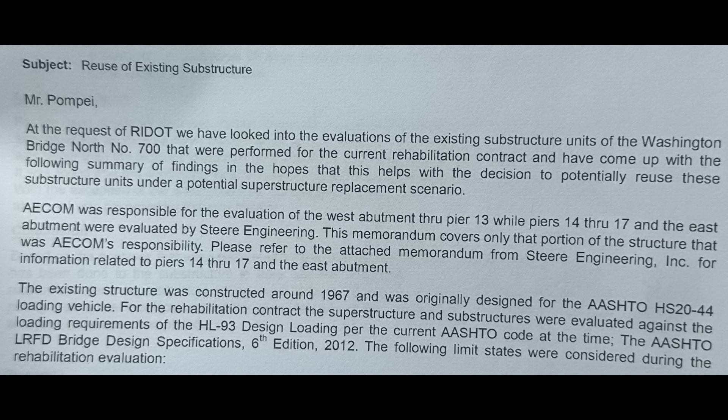So AECOM looked at the western half of the bridge from the west abutment through Pier 13, and then Steere Engineering looked at Piers 14 through 17 and the east abutment. So let's look at some of the things that they took exception to for their study. They did not perform an evaluation of the existing pile-supported foundations, as it was not in the scope of work for the rehabilitation project. And then they talk about the design methodology.

If you look at item 5, under the current contract, the substructures and the superstructure were being rehabilitated to provide for an additional 25-year lifespan, whereas a new superstructure would likely be designed for at least a 75-year lifespan. And in their analysis findings, for the west abutment through Pier 13, the results of the analysis showed that none of the columns required any strengthening, as they all have design ratios greater than 1.0. So they're talking about the pier columns.

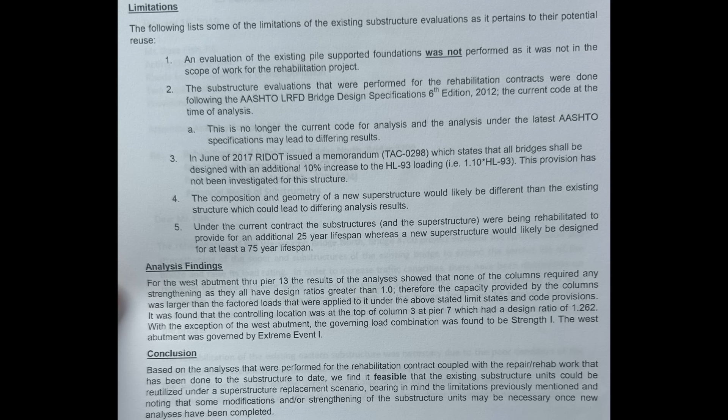In conclusion, based on the analyses that were performed for the rehabilitation contract, coupled with the repair/rehab work that has been done to the substructure to date, we find it feasible that the existing substructure units could be reutilized under a superstructure replacement scenario, bearing in mind the limitations previously mentioned and noting that some modifications and/or strengthening of the substructure units may be necessary once new analyses have been completed.

Now let's look at the Steere Engineering memo. Dear Mr. Fish, they're referring to Mr. Dave Fish, PE, who is at the time acting chief engineer for RIDOT. The rehabilitation of the Washington Bridge North Bridge 700 project included the rehabilitation and strengthening of the super and substructures of the existing bridge to extend the service life of the bridge and raise its load rating.

In order to increase traffic capacities, there have been discussions on replacing the superstructure while utilizing the existing substructure. Steere Engineering was responsible for the design of the eastern approach of the bridge from Pier 14 through the east abutment, including both the super and substructure. This memorandum concerns only that portion of the bridge.

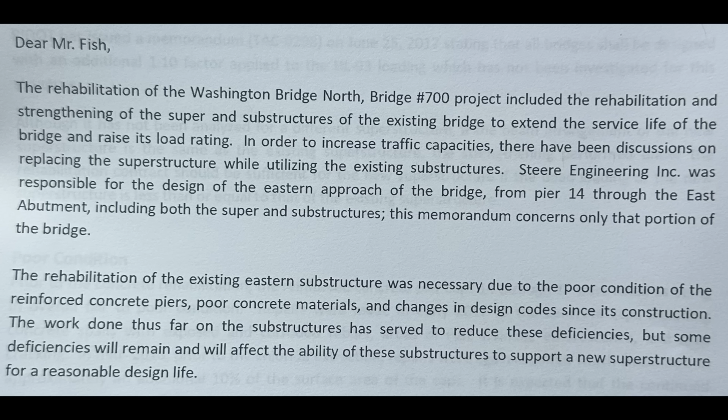They go on to say the rehabilitation of the existing eastern substructures was necessary due to the poor condition of the reinforced concrete piers, poor concrete materials, and changes in design code since its construction. The work done thus far on the substructures has served to reduce these deficiencies, but some deficiencies will remain and will affect the ability of these substructures to support a new superstructure for a reasonable design life.

And we're going to page 2, and I talk about the difference between the original and the current design loading. And at the bottom of page 2, talk about poor condition. Prior to the concrete rehabilitation, the reinforced concrete pier caps 14 through 17 were rated as being in overall fair to poor condition. Repairs were made in early 2017 to the concrete caps, including concrete spalls with exposed and corroded rebar, areas of rust staining, efflorescence, and map cracking.

In mid-2018, prior to the chloride extraction, repairs were again required, which amounted to approximately an additional 10% of the surface area of the caps. It is expected that the continued deterioration will be reduced now that the chloride extraction has occurred, though no results have been provided as of the writing of this memo. However, the caps will still be exposed to water and salt through unrepaired bridge deck joints.

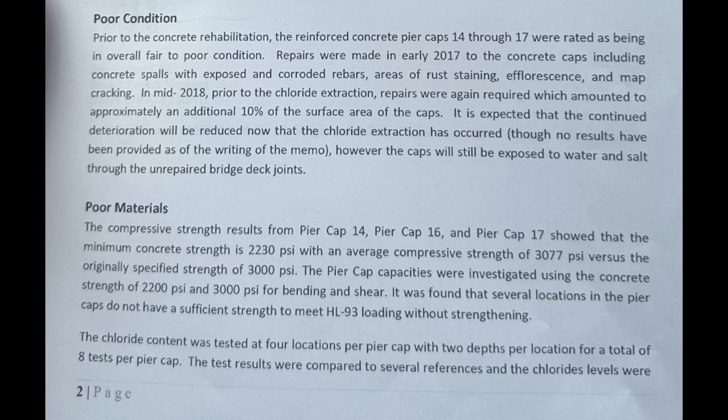The next paragraph, poor materials, basically indicates that the pier caps 14, 16, and 17 had lower strengths, considerably lower strengths than what was specified originally for the construction of 3,000 psi.

And then the last page, this conclusion: it may be feasible to reuse the existing eastern approach substructures to support a new superstructure. However, further structural analysis will need to be completed to determine the new loading on the existing substructure, including seismic, and there are several serviceability considerations that need to be considered. Piers and abutments would need to be modified in order to have a wider superstructure.

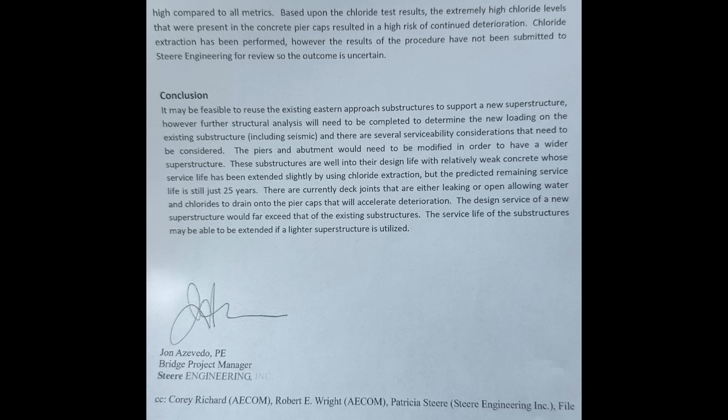These substructures are well into their design life with relatively weak concrete whose service life has been extended slightly by using chloride extraction, but the predicted remaining service life is still just 25 years. There are currently deck joints that are either leaking or open, allowing water and chlorides to drain into the pier caps that will accelerate deterioration. The design service of a new superstructure would far exceed that of the existing substructure. Service life of the substructures may be able to be extended if a lighter superstructure is utilized.

So again, we see a mention here of poor maintenance and repair of this bridge deck for years that led to deterioration of several aspects of the bridge. The pier caps, and later we found the corrosion of the post-tension anchors. So I'm going to circle back with all the questions these studies and these memos raise in my mind. But again, to show that RIDOT was apparently serious about looking at replacement of the superstructure as well as rehabilitation of the substructure for the Westbound Bridge that was later closed and demolished.

This is April 23rd, 2019, from a Lori Fassett. I understand she serves as a project manager at RIDOT, and she's sending an email to Anthony Pompei, who we mentioned previously, and they're talking about the anticipated cost. And she says, we based it on the bid price of the Washington Bridge South Replacement Project from 2003 that was $40 million, which had more significant substructure work. With inflation, we estimate about $50 million for the superstructure replacement and another $10 to $15 million for the ramp highway work, which gave us a $65 million.

So why did they look in 2019 to replace the entire superstructure of the Westbound Bridge and rehabilitate the substructure? And instead of doing that for $65 million, decided, oh, we're going to do essentially partial repairs, not replace the bridge deck, apparently not do anything to the substructure, and it's going to cost $78 million. That was a contract awarded in 2020 to Aetna Barletta. And they get halfway through that contract when they discover the broken anchor rod, and the rest is history, as they say.

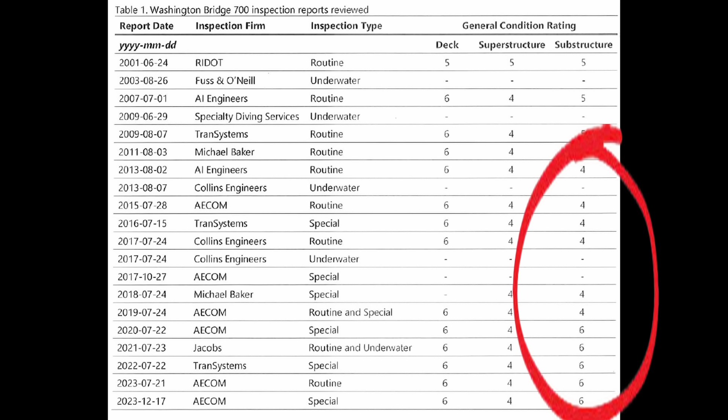One of the things, and this was brought up at the hearing when Attorney Cunha posed these questions to RiDOT Director Peter Alviti, but they referenced the Wiss Janney forensic evaluation report and noted that the substructure condition rating from the bridge inspections for the Westbound Bridge was a 4 all the way from 2013, and then suddenly changes, goes from a 4 to 6 in 2020.

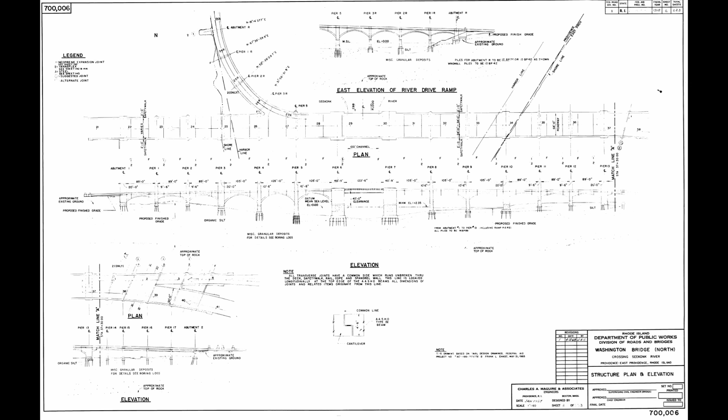And again, it's not clear what, if any, work was actually done to the substructure to change that rating. Director Alviti at the hearing referenced that there was work done, but didn't provide any specific information. I suspect that it wouldn't be possible to reuse the existing foundation and just put a new superstructure on it as they were planning back in 2019 if the condition rating was only a 4 for the substructure. And it looks to me to be some minor miracle that suddenly the condition rating went to 6. But again, there's so many things about this project that don't make sense to me.

Now, at the end, I'm going to go through a list of questions that I have about what all this may mean. But I think it's extraordinary that RiDOT clearly was looking at replacing the westbound bridge clear back in 2019, and instead they embark on a series of contracts that weren't completed for a variety of reasons, and they didn't resemble, in terms of scope, anything approaching a more ambitious superstructure replacement project.

Before I get into those items that occurred to me here, I want to mention I had that video post this morning, and a lot of you have commented about the rather appalling performance of RiDOT Director Peter Alviti in terms of not being able to recall key information, not being knowledgeable about key aspects of his administration of the DOT.

And another possibility occurred to me, and that is sort of like if you're a Kung Fu fan, there's an old 1978 Jackie Chan movie called Drunken Master. It's a form of Kung Fu where Jackie Chan either was or pretended to be intoxicated to throw his opponent off balance. His opponent had difficulty engaging him when he was fighting in this unconventional drunken style. And the thought that occurred to me is that perhaps Director Alviti is completely willing to play the fool, as it were, by saying he doesn't know things that he should know instead of actually revealing the truth.

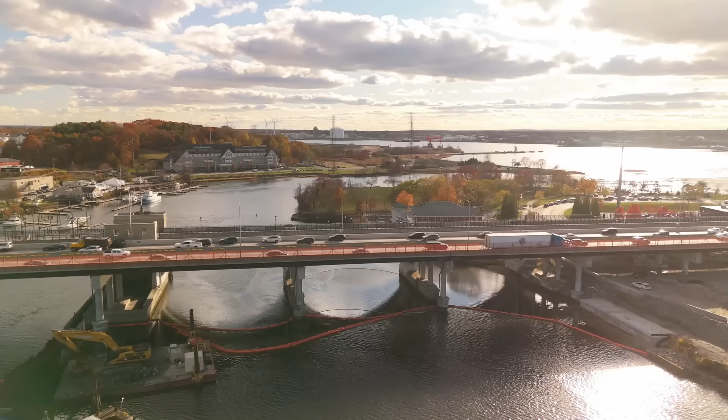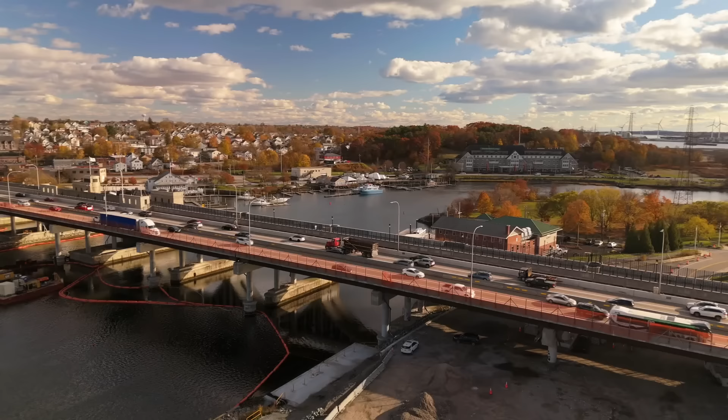Why did RiDOT pursue a $78 million rehab project with Aetna Barletta in 2020 that apparently did not include superstructure replacement or work to improve the substructure condition? Remember, they were approximately halfway into this project when the bridge was shut down in December 2023 due to the discovery of the broken anchor rods. Another point, how was it that the broken anchor rods were reportedly undetected until the young engineer came along in December 2023 who accessed these anchor rod locations using catwalks that were left by Cardi Corporation clear back in 2018?

And lastly, why was RiDOT planning to reuse the existing pile foundations for the Westbound Washington Bridge without any apparent condition assessment of these foundations in 2019, but chose to not reuse these same foundations following the 2023 closure? Yet again, apparently no condition assessment of the pile foundations had been performed. So I really hope that local investigative reporters will dive into these issues. There's plenty of things to peel back there. Perhaps these questions can be addressed at a future oversight hearing with the House, Senate, and the DOT. I hear that there may be future hearings. I don't know.